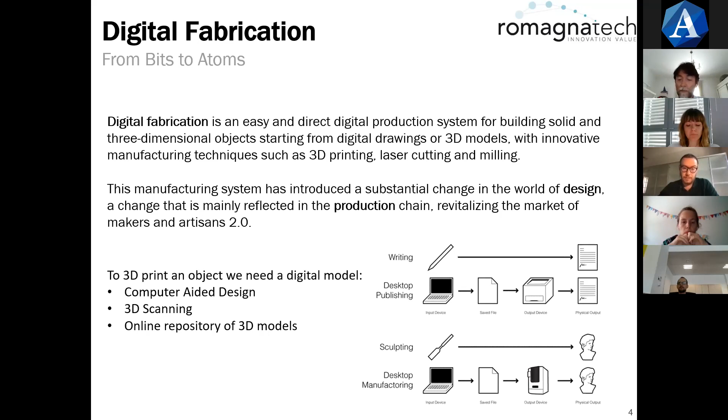To 3D print an object, we need, as I told, a digital model that is the starting point, and we can obtain it by means of a computer-aided design approach, by means of 3D scanning, or by browsing online repositories of 3D models. But digital fabrication inverts the economics of traditional manufacturing. I will come back also later to this theme because it's very important for our workshop.

In mass production, most of the costs are up front in tooling. So there are a lot of costs to set up the production, the manufacturing lines to produce goods and products. And the more complicated the product is, the more changes you need to make, the more it costs.

So in this picture, we can say that digital fabrication has a very different, reverse approach. What is expensive in traditional manufacturing processes is not expensive, is free for digital fabrication. For digital fabrication, variety is free, it is not a cost, complexity is not a cost, flexibility is not a cost. While these aspects are very important for the cost of traditional processes.

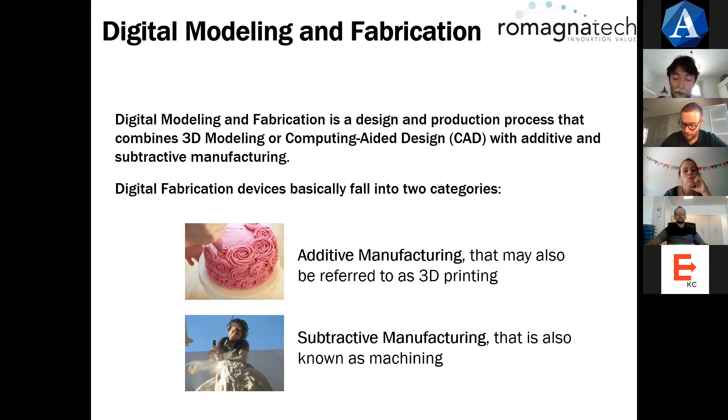We said that manufacturing and design, fabrication and modeling are strictly linked together, because in the digital modeling and fabrication approach, we combine 3D modeling and additive or subtractive manufacturing. Additive manufacturing can also be referred to as 3D printing, of course, and subtractive manufacturing is also known as machining or milling. These are just some pictures that show the different approach of these manufacturing technologies.

It is important to underline that additive manufacturing processes allow a reduction of waste material, so also an important attention to the sustainability of the production, instead of subtractive manufacturing that will produce more waste material.

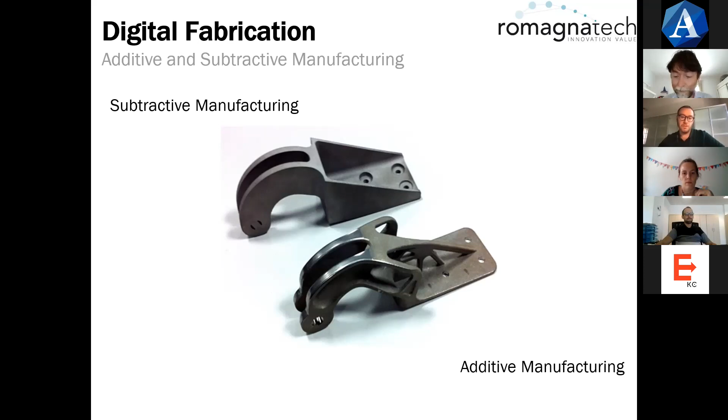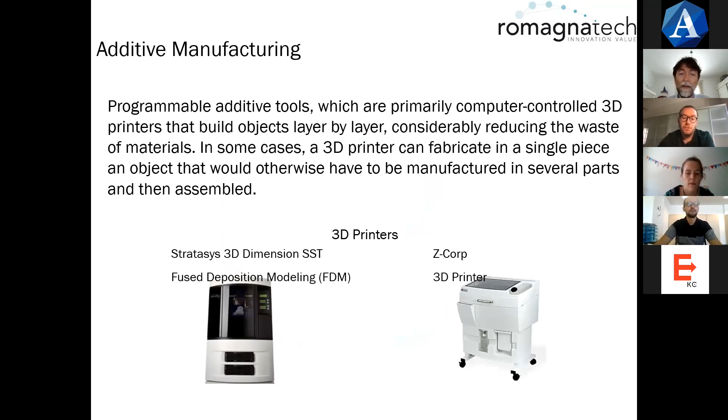We can clearly see that this kind of design, this kind of result, is not possible to obtain by means of traditional manufacturing processes. So we need a new design, and we need new technologies for manufacturing this kind of product. Well, we can quickly see additive manufacturing technologies, but we will have a better focus later, and also subtractive manufacturing, just to have a first comparison of these technologies.

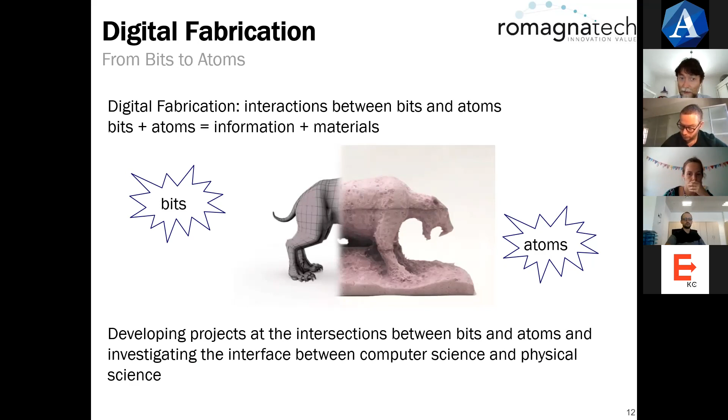So just to close this first introduction, we can say that digital fabrication is a way to move from bits to atoms, from information to materials, from data to materials. It is a way to move from digital to physical. This interaction between the digital world and the physical world is the basis of digital fabrication approaches. And a lot of projects are investigating ways to optimize the interaction between these two representations of the same object.

Well, talking about digital fabrication, we can jump back to 1998, to the Fab Lab concept. Fab Lab means fabrication laboratory, and Fab Labs represent a network of facilities for digital fabrication. The idea of the Fab Lab was conceived by Neil Gershenfeld, the director of the Center for Bits and Atoms of the Massachusetts Institute of Technology. So we find both aspects of the representation of an object, the data representation and the physical representation.

And the first Fab Lab started in 2002 at MIT, and in the following years, this model of digital fabrication really spread over the world, and this was possible by means of the standardization, the democratization of design tools, such as rapid prototyping, the digital networking between all the Fab Labs around the world, and also by means of the dissemination of good digital practices.

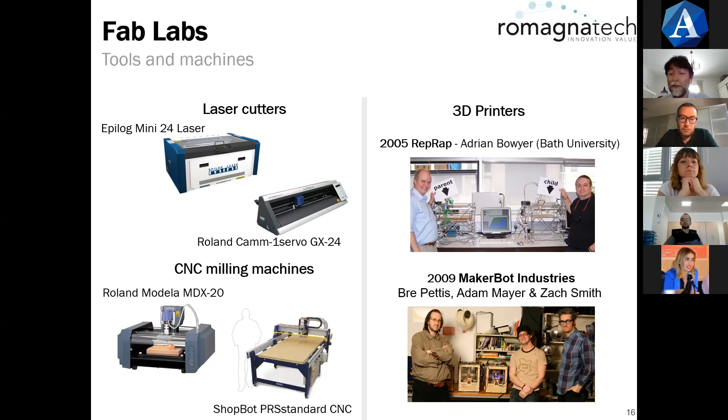So just an overview of the tools and machines of Fab Labs. We can see some laser cutters and CNC milling machines, and I have just posted some pictures of important steps in the 3D printing evolution. So the RepRap and the MakerBot machines that opened the way to the open access also to these kinds of technologies.

Well, now we can focus on different manufacturing technologies, just having an overview of what we can find in the world of additive manufacturing. It's quite recent, but fortunately we have some international standards that allow us to have definitions, to have a description of the general principles, to have some feedback on terminology and so on.

So the first thing that we can read is what is additive manufacturing, how additive manufacturing is defined. Well, there are a lot of definitions. We can see a lot of norms that we can use to refer to this kind of technology, but the international standard states that additive manufacturing is a process of joining materials to make parts from 3D model data, usually layer upon layer, and it is a process that is opposite to subtractive manufacturing and to formative manufacturing technologies. So a process of joining materials layer by layer. And this is the definition of this kind of manufacturing technology.

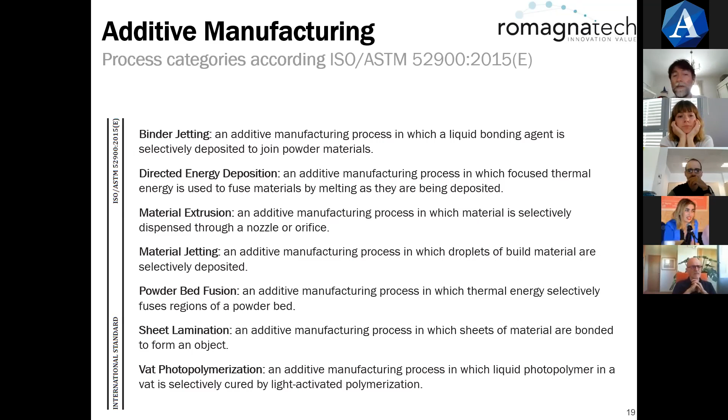Did we lose Massimiliano? ...show. Okay, you're back. Okay. Have you shared computer sound?

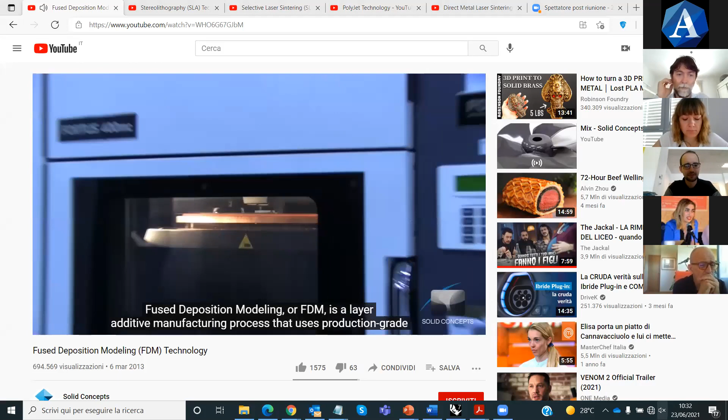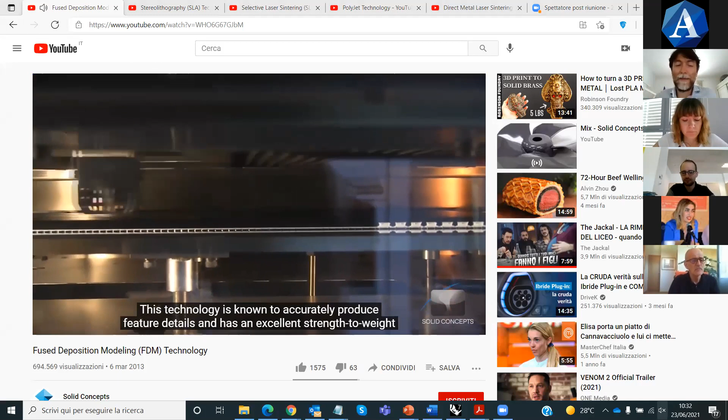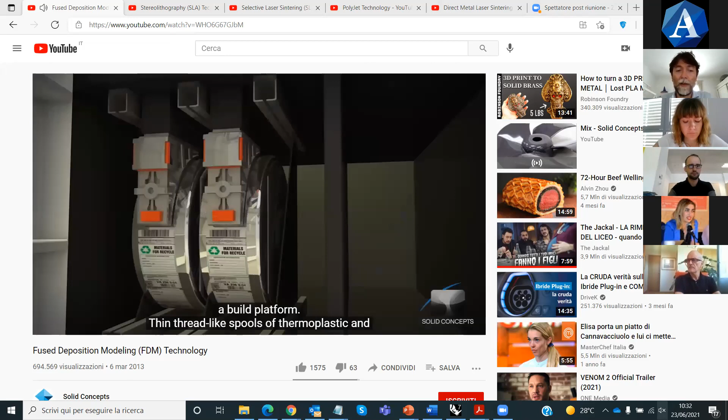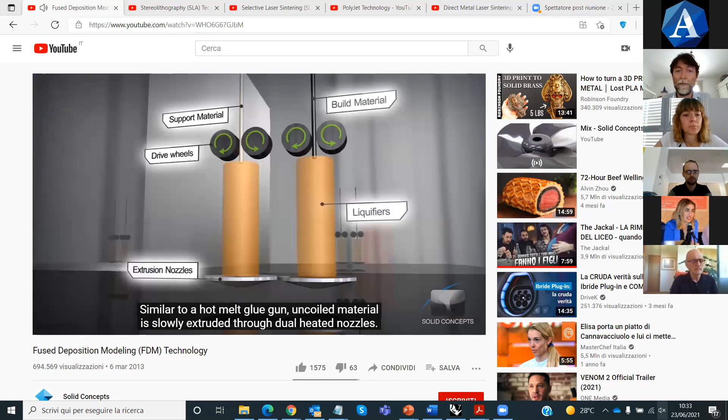Okay, this is the first family, fused deposition modeling. This is the most famous technology. It is very used by makers. It's very easy to find these technologies in Fab Labs and so on. These videos are showing the working principle. We have some thermoplastic filament that is extruded to build up the model layer by layer. Together with the build material, we can also have support material that is used to support the overhanging parts of the model, such as in this case.

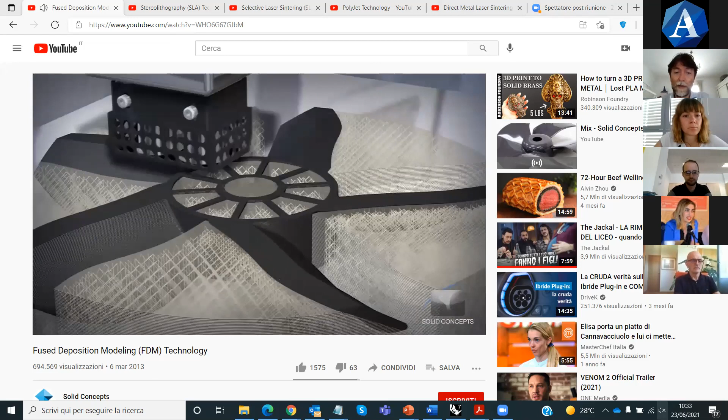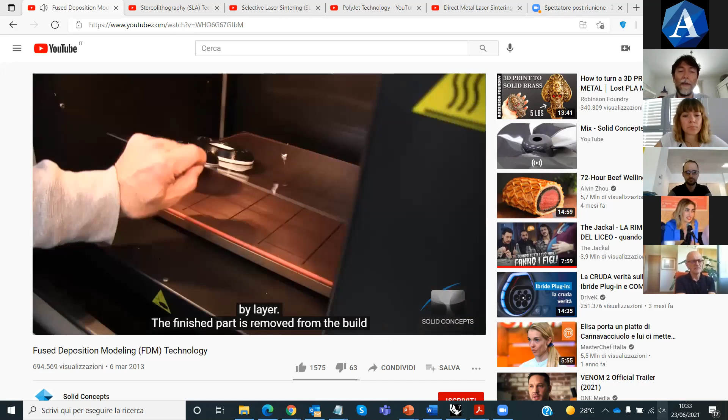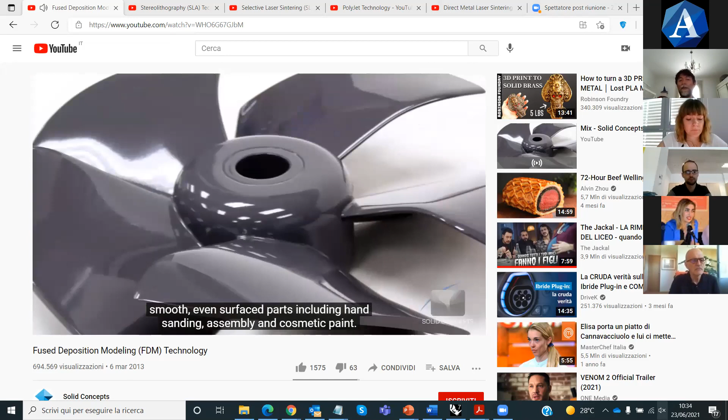Here we can see how this technology is working layer by layer. The different colors represent the different layers of the model. Now we can remove the support material, the white material, and clean the model. This is the final result, which also allows us to finish the surface of the model to give a better aesthetic aspect, following maybe requirements of the products.

And this technology is applied in a lot of applications because it's very functional.

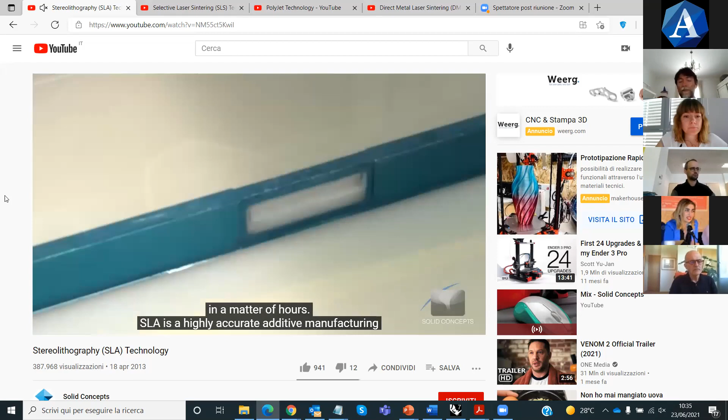We can close this and move to the second technology, called stereolithography. This is one of the most used for aesthetic prototypes, because this kind of technology gives us objects that are very nice from an aesthetic point of view, but the mechanical characteristics are not so good. So for functional prototypes it's not the recommended technology.

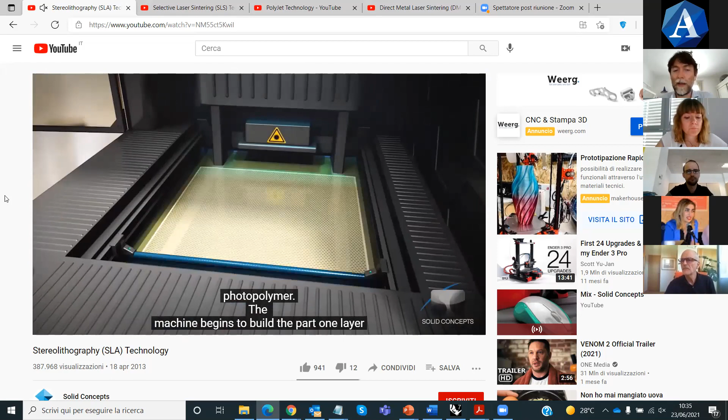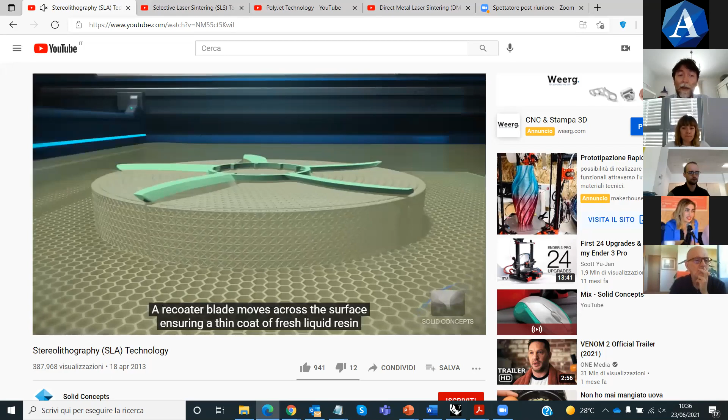But we know that we can face both functional or aesthetic prototypes, so we can choose the better support. In this case the working principle is based on UV resin that is hit by a UV laser, which allows the curing locally of the material. So we can also, layer by layer, complete the construction.

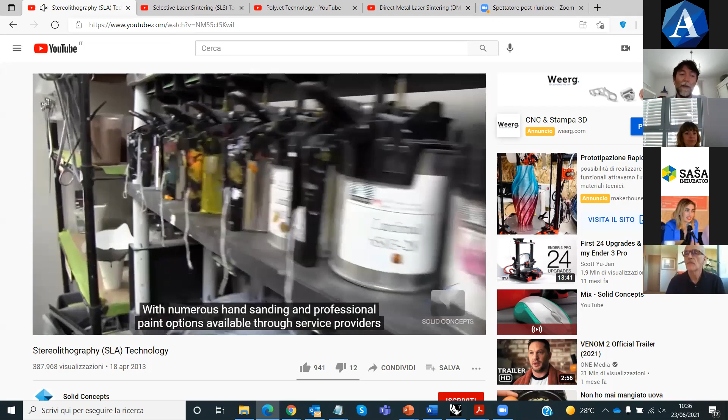We always need to clean the product. This is a post-processing step. We can see the superficial finish, the final coating, and this is the final result.

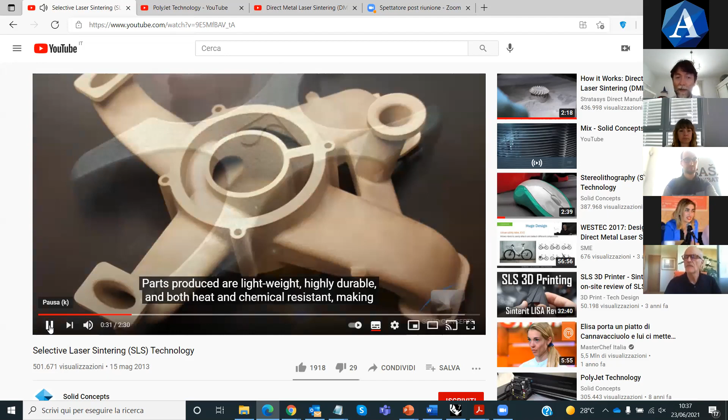We move to another technology that can also be used in a lot of fields of application, and this is called selective laser sintering. In this case, we have a powder that is sintered by means of a laser that hits locally the surface with the powder.

So the first layer is created, then we move to the second one, and so on.

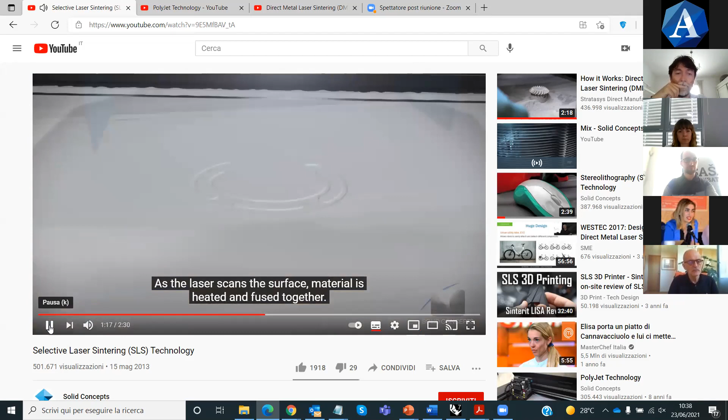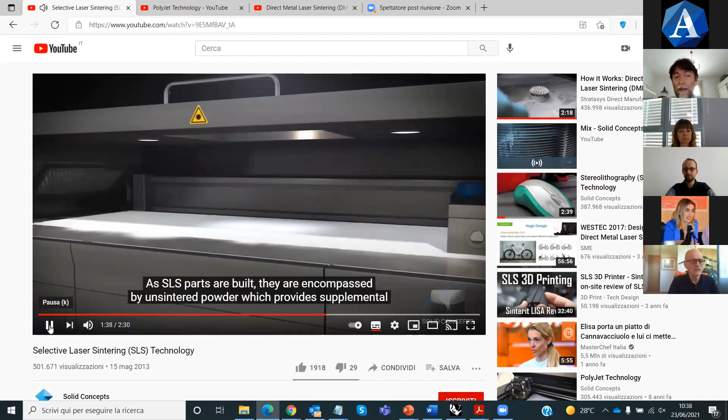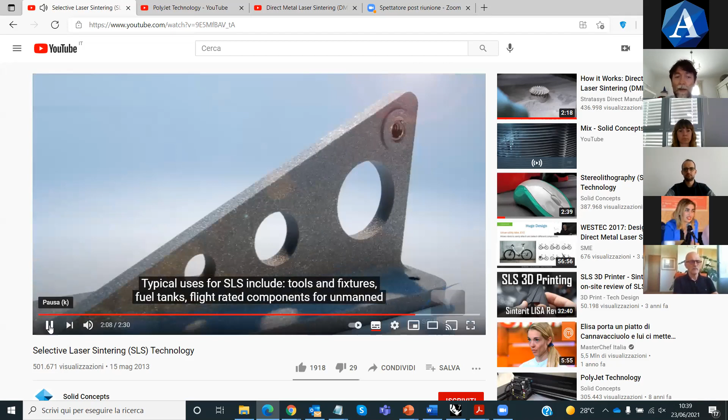All these technologies work by adding a layer of material on the previous layer, and it is important to manage the thickness of the layers to provide better results. So the basic principle is the same, that is the additive approach, but all these technologies are based on very different working principles.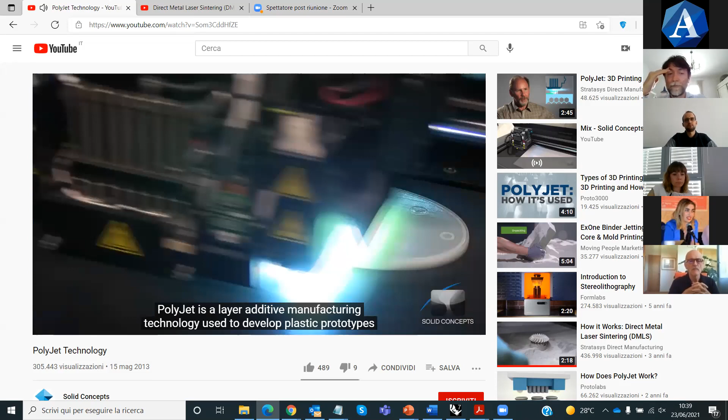Okay, we can see some examples of application. Now we have the last two technologies I'd like to show you. The market offers a lot more solutions, of course, but I think these technologies are the more suitable for this field of application, for what concerns manufacturing in craft activities. This is polyjet.

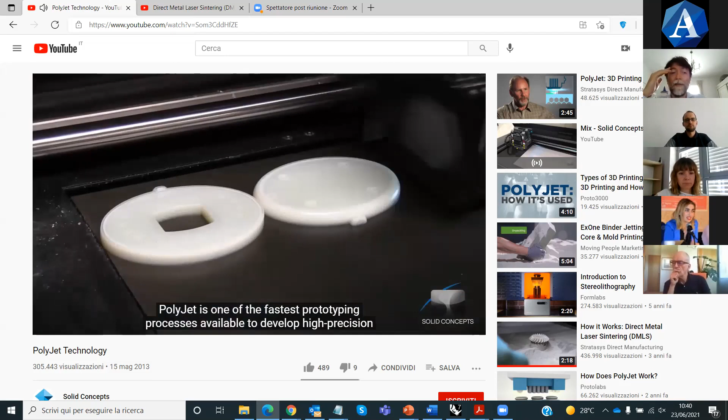You can see some toys, some products.

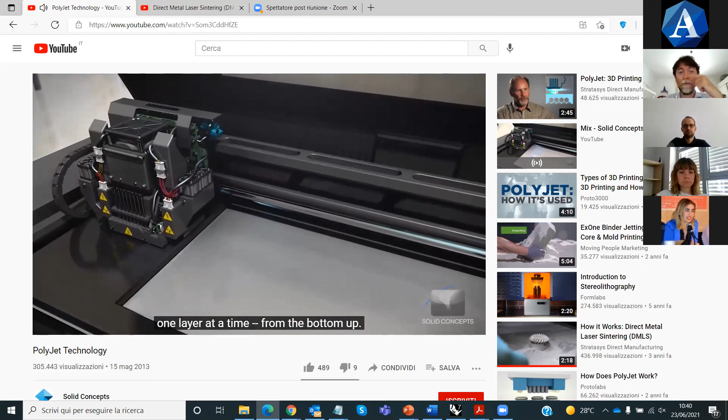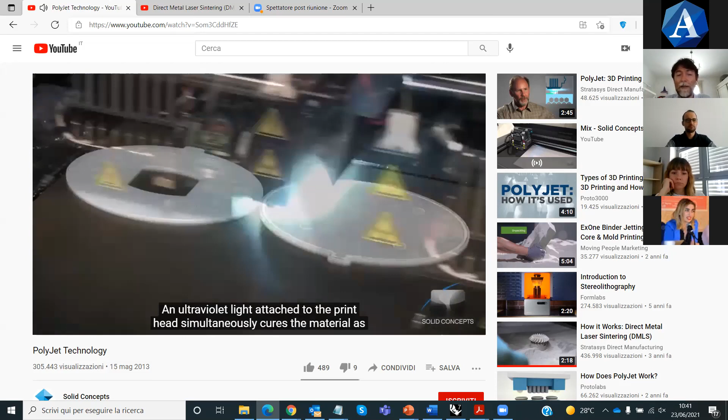We have some inkjet that is dropped down on the material, so that allows the selective creation of the layers.

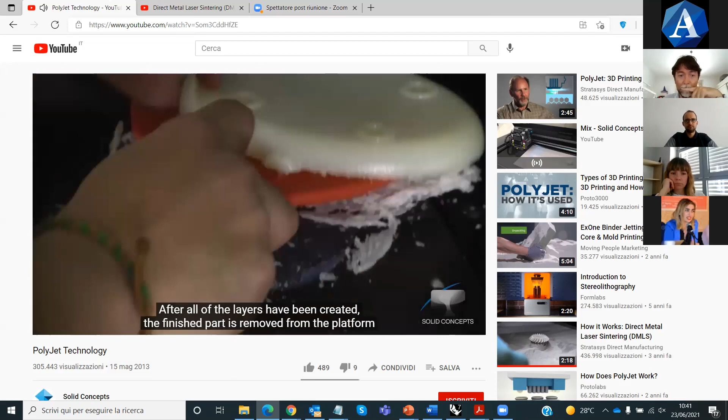Okay, yeah, the finish, the post-processing steps. Also in this case, we can have very nice prototypes, very nice objects, very nice products.

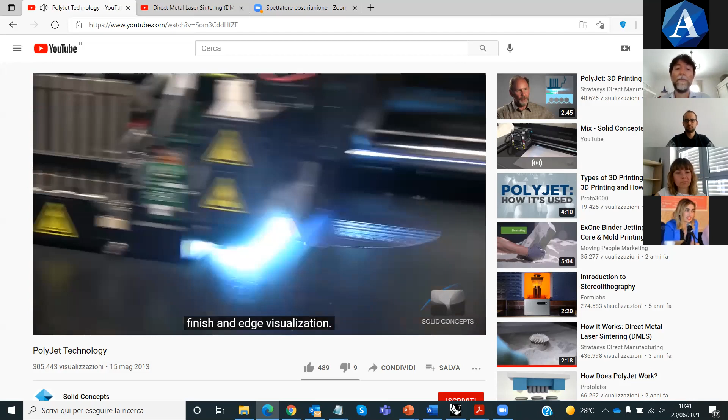Well, the last technology is quite different, particularly for what concerns the material that can be used. In this case, we are facing direct metal laser sintering. In the previous technologies, the basic materials were mainly polymers, different kinds of polymers, but

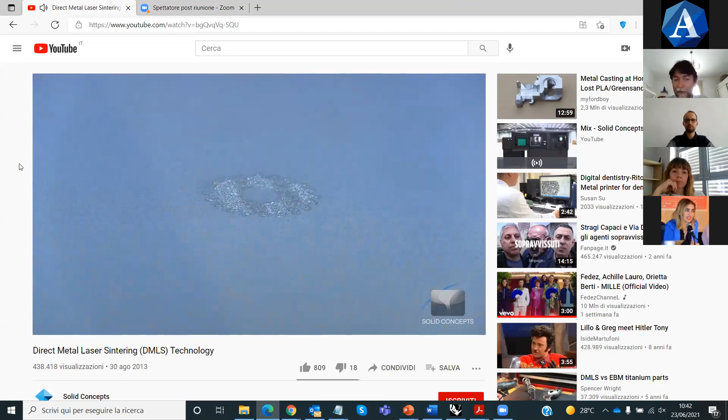with this technology we can also build objects with metals, different kinds of metals. So it is very useful for, for example, the manufacturing of spare parts, so that we don't need to have a lot of stock, and we can just produce on demand.

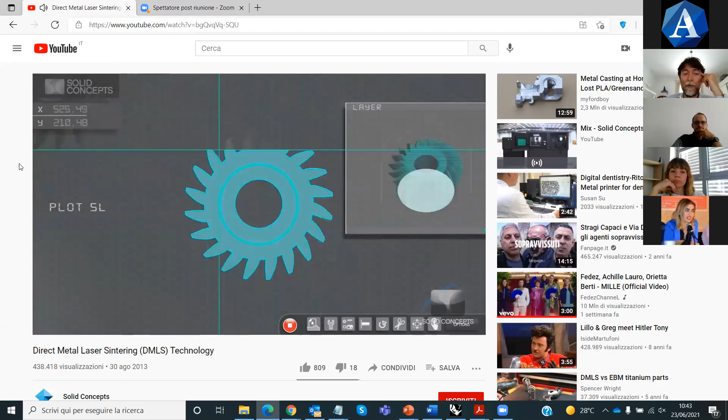Also, products that are not prototypes, but are products directly for the market.

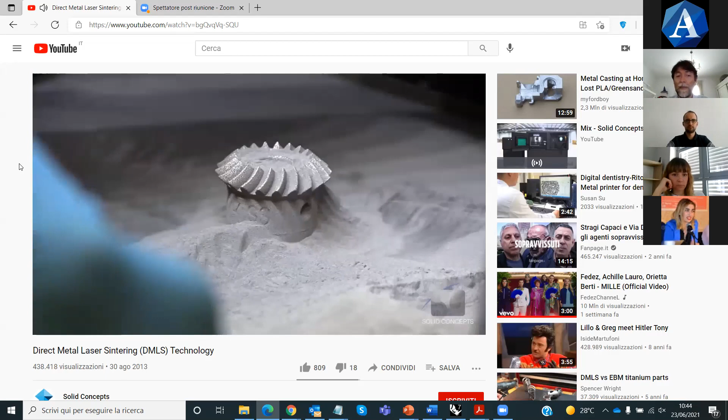The process is very similar to selective laser sintering. The main difference is the material, of course. In this case, we have metallic powders, and the source, a laser in this case, needs more energy since we need more energy to sinter the metallic powders.

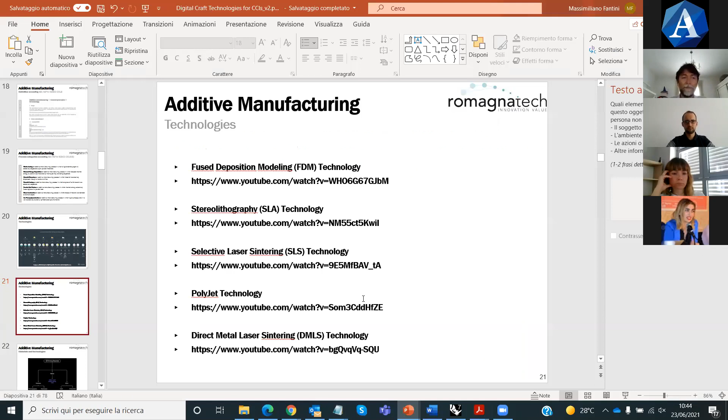So I think that's all for what concerns the video, just to have an overview of these technologies. And I'm going to close this first part of the presentation by focusing on the materials.

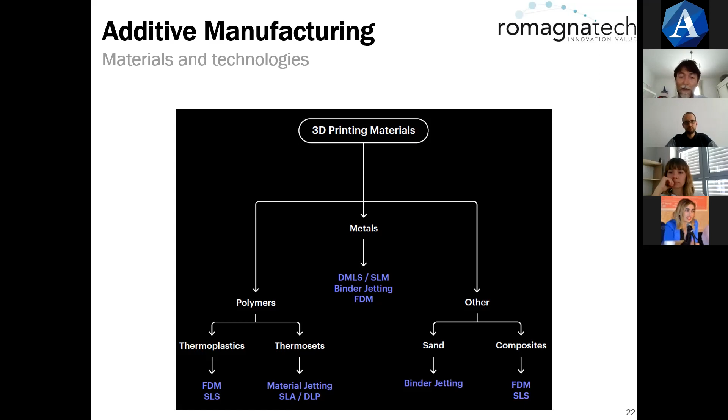We have seen different technologies, we have seen different families, and each technology faces specific materials. We can see that we have polymers, both thermoplastics or thermosets, depending on the additive manufacturing technology used. We can have metals, as we have just seen, but also other kinds of materials, such as sand, composites, and so on, but also fine materials such as chocolate for food manufacturing, also biomaterials for biomedical applications, and so on.

Of course, we can have different results according to the technology that we use, and we can select the technology according basically to the needs of the object that we need to prototype. So the first question is

why do I need this 3D printed object? Is it just for an aesthetic point of view, just to communicate a concept, or do I need to stress the object by means of some mechanical test to validate, for example, a design before going into the production steps. This kind of question allows us to understand and to try to choose the better technology to obtain the result.

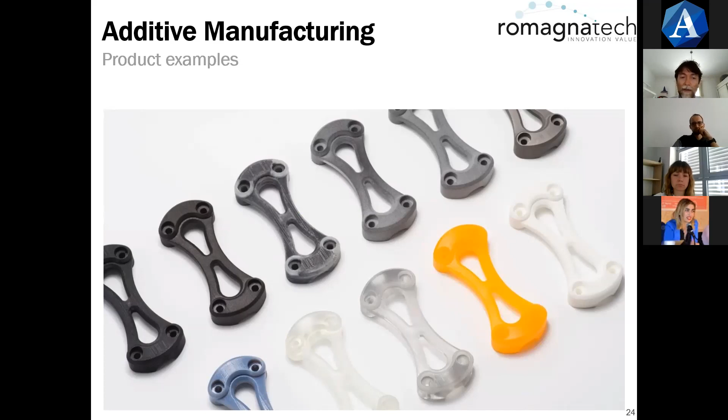And what can we do with this additive manufacturing technology? What can we do by means of digital fabrication? Here we can see just some examples that I've chosen for the field of creativity, the field of fashion, also interior design, and so on, also jewelry.

So there are a lot of possible applications that allow us to obtain results that we cannot obtain by means of a traditional manufacturing approach. So this technology allows us to change also the design processes.

We have seen that the design and the manufacturing are strictly connected, because they are different steps of the same process for developing new products. And of course, the capabilities of these manufacturing technologies are pulling new capabilities also in the design approach.

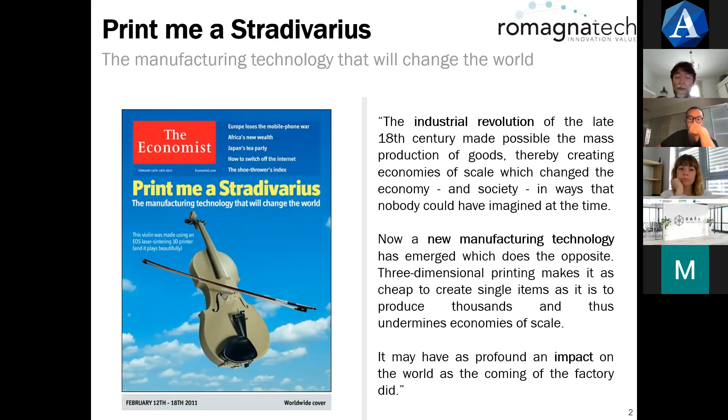Now, new manufacturing technologies such as additive manufacturing are doing the opposite. Three-dimensional printing makes it as cheap to create single items as it is to produce thousands of them. So it is not connected to economies of scale. If I need to create just a few products with this kind of technology, I can do it. So this approach to digital fabrication was seen as something that would change the manufacturing paradigms.

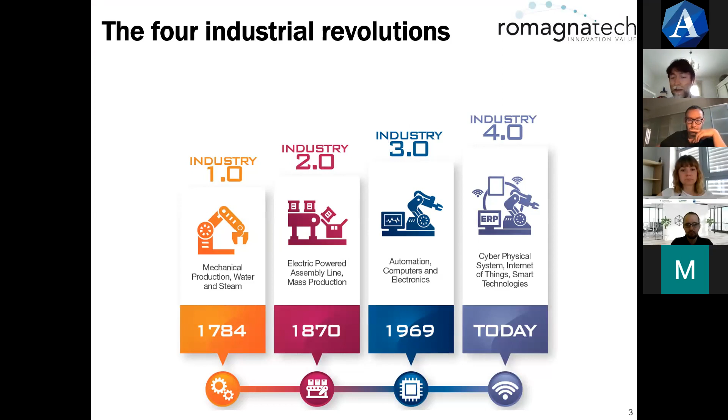So mechanical, electrical, informatica. So the fourth revolution is now facing new technologies, new approaches, new possibilities of managing both digital and physical things. Sorry. And this fourth industrial revolution, also known as Industry 4.0, is very important for what concerns innovation of products, open innovation, digital transformation, sustainability, and so on.

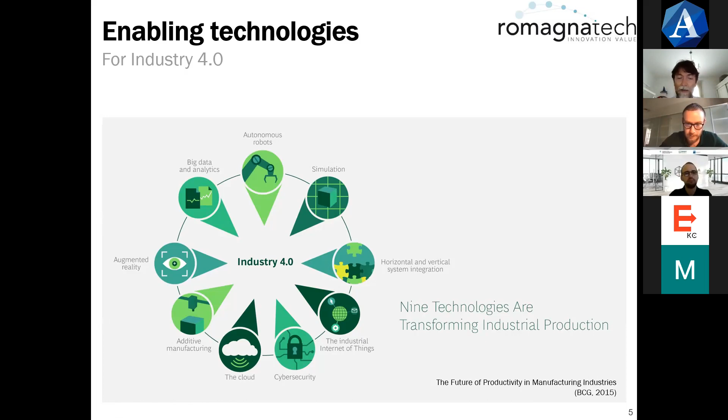We are back to 2015, so 5 years later, the title of The Economist, and this is a report of the Boston Consulting Group that, in this paper called Industry 4.0, the future of productivity in manufacturing industries, tries to identify the main technologies of the fourth industrial revolution. Within these 9 technologies, we can see also additive manufacturing. So this is just another point in favor of the application of additive manufacturing in industry.

Well, additive manufacturing is important because companies, we are in 2015, have just begun to adopt additive manufacturing, such as 3D printing, not just to prototype something, but also to produce individual components. So the most important step is moving from the prototyping application to the production application. This is a very important step in this kind of processes.

These additive manufacturing methods, Boston Consulting Group states, are widely used to produce small batches of customized products that offer construction advantages such as complex, lightweight design. We have seen also before how the design is a key factor to obtain good results.

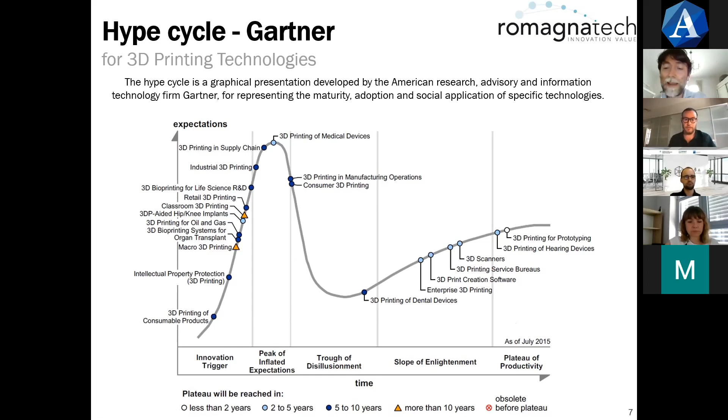So we can see anyway that in 2015 different technologies were already on the final part of the graph. That means that we are facing completely mature technologies. And of course, the first is 3D printing for prototyping, because as I told you, it was the first application and the most studied market segment.

By analyzing this 3D printing revolution, this is an analysis of Christopher Barnatt, 2016, 3D Printing. He tried to analyze markets and applications of the 3D printing revolution. He identified 4 distinct market segments: rapid prototyping, molds and tooling, digital manufacture, and personal fabrication. In the top line, which represents today in 2021, we have a completely mature market segment, rapid prototyping, as we have seen also in the previous graph by Gartner.

Also molds and tooling, and later we'll see in detail what kind of application it refers to, is in a good position. Digital manufacture is the third market, and finally we have personal fabrication, which is the last market in terms of starting point, but of course is the most promising, because it has the possibility to increase a lot in 3D printing adoption. The rapid prototyping market is quite full in adoption of this technology, but we have a long way to run for personal fabrication.

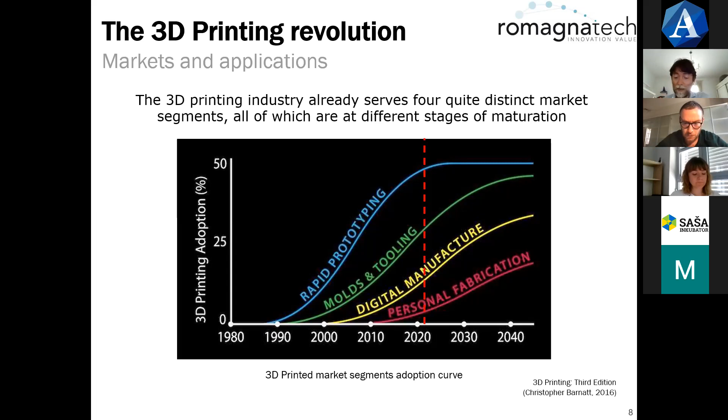Well, rapid prototyping, as is well known, means using technologies such as 3D printing to create prototypes or concept models, and mainly this application is used during the process of developing new products to reduce the time to market, the time from the idea of the new product to the release on the market. This is also known as a time compression technology. So with the aim to reduce the time to market, we can provide both aesthetic or functional prototypes.

Aesthetic prototypes are also called looks-like prototypes, while functional prototypes are also called works-like prototypes, because they have different aims. The goal of an aesthetic prototype is to provide a physical sample of what the product will look and feel like. In this case, this is the prototype of, for example, a ring, but the final product will be in different materials. This allows us to communicate the shape, to have a vision of the shape of the object.

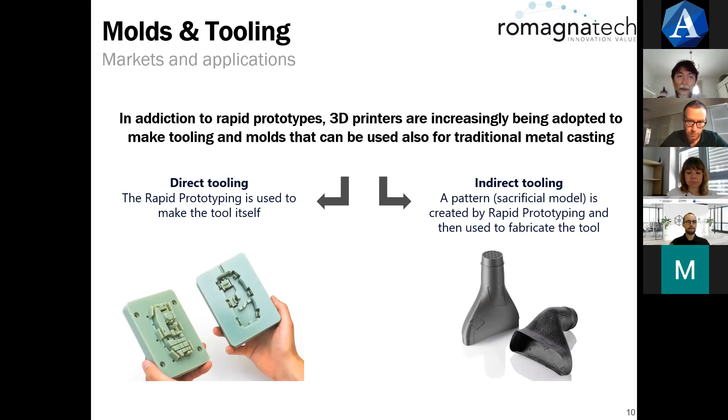So we have one more step in indirect tooling, and we can see here this item is the sacrificial model that will be used to create the mold on this shape, and then the mold will be used to obtain this, that is a final product made by, I think, composite materials.

Then we move to the third market segment that is called digital manufacturing, also called direct digital manufacturing. And what does it mean? Well, according to the American Society of Manufacturing Engineering, direct digital manufacturing refers to the process of going directly from an electronic digital representation of a part, so going from a 3D model directly to the final product by means of additive manufacturing. So the result of the process in this case is not a prototype, is not a tool or molds to obtain a product, but is the product itself.

So what drivers for direct digital manufacturing can we underline? There are four main aspects. The first is the ability to use 3D printing to optimize the geometry of final parts, often saving raw materials in the process. Second, make parts with geometries that could not be created by means of traditional approaches. Third, make low runs that would not be cost effective to manufacture without 3D printing. So if I have a small batch production, a small number of items to be done.

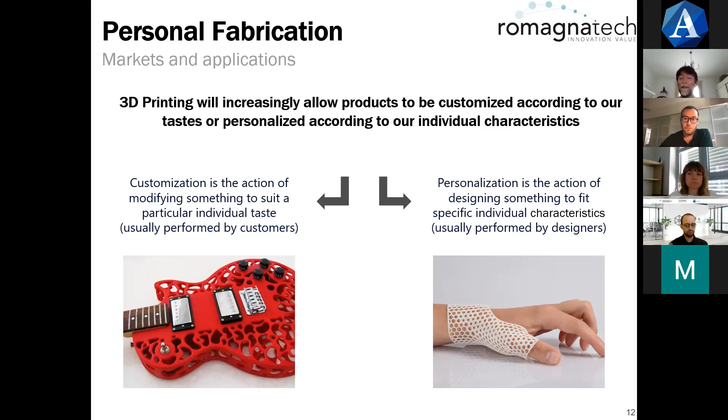Okay, so this aspect is usually performed by designers and is mainly used in the biomedical fields, and also fashion, also jewelry, if you want to provide some technology, some results, some products that completely fit the shape of the customer.

So we can also talk about this kind of revolution from the point of view of the manufacturing paradigms. We have seen the 3D printing revolution stepping through different market segments. Now we'll have a look at the revolution of the manufacturing paradigms. Manufacturing enterprises are involved in three main activities: design, make, and sell. This is as reported in the paper of Yoram Koren in 2010, the global manufacturing revolution.

These are the main activities: design, make. We have always talked about that, the design and manufacturing processes. Also, sell, of course, is an important activity that manufacturing enterprises have to face.

And the relationship between these three activities is able to identify specific manufacturing paradigms. So, different order of these activities changes the model of manufacturing. In craft production, we have sell, design, and make. The artisan, as the first step, sells the product to the customer, then moves to design it, and finally is able to make it.

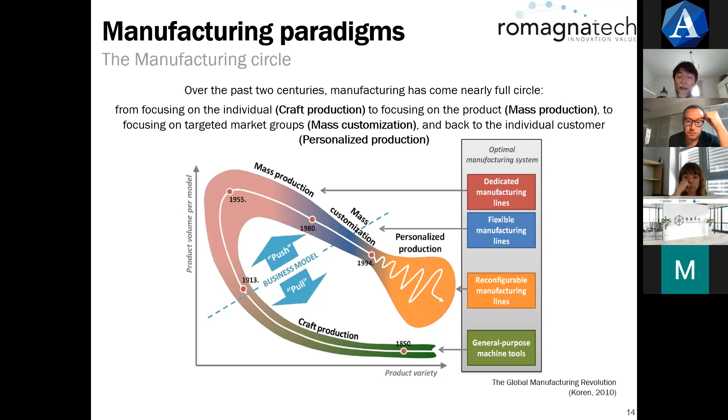So we can see craft production, mass customization, personalized production. And we can see that both from the point of view of the 3D printing revolution and from the point of view of the manufacturing revolution, the last step faced is personalized production.

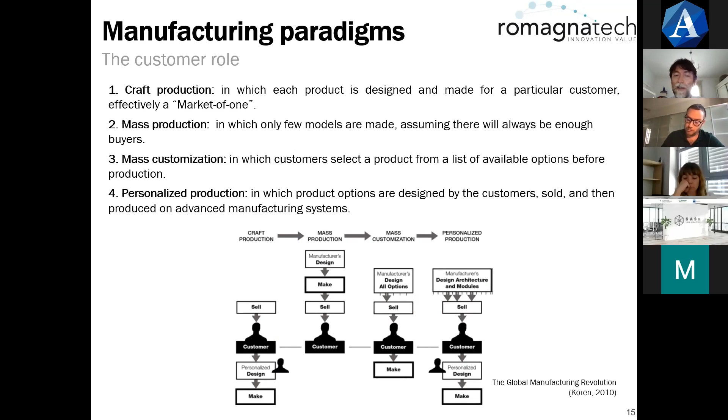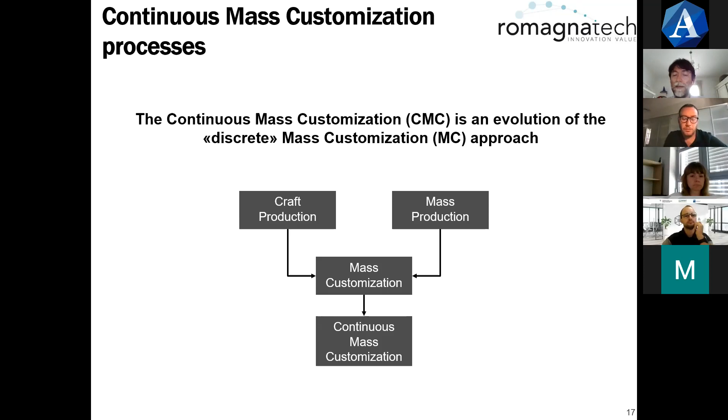So, coming back to the title of the presentation: continuous mass customization process. What does it mean? Continuous mass customization is an evolution of the discrete approach of mass customization. We can see mass customization as the possibility of developing a wide number of items, such as in the mass production approach, but with the possibility to customize these items, such as in the craft production capabilities. And the next step is to try to perform a continuous mass customization.

What does it mean? Now, in which context are we moving? Now there is an increasing number of consumers, of customers that are moving to the online market with new expectations, with new needs, and also with a new approach to the product. These customers are mainly informed about products and have an increasing awareness of these products. So product customization is a continuously growing trend. So customers always need something that is as much as possible tailored to their taste, their shapes, and so on. And how can this kind of process be supported?

The mass customization process is nowadays carried out through interaction of the consumer with a web interface that allows him to customize his product. So the user is directly involved in the design process, and that is why we have seen different schematic representations of the stakeholders in the different processes of manufacturing. In this case, the role of the customer is an active role that allows him to directly collaborate in the design steps.

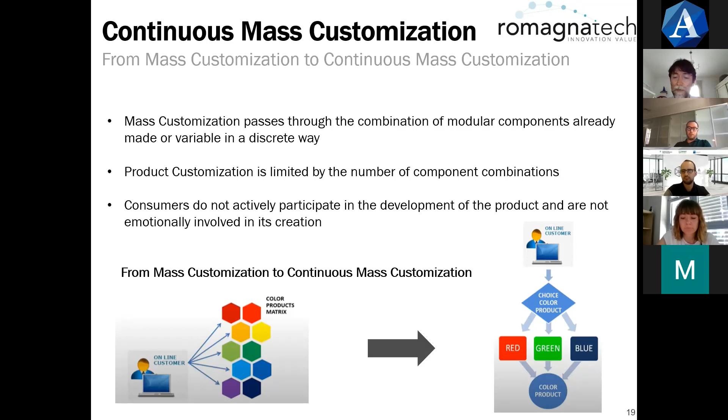So the idea is to move from mass customization to continuous mass customization. This is a clear example for what concerns a color product matrix, a palette of colors. In the first case, we can choose between a discrete number of colors. In the second case, we can decide the code, the RGB code of the color, so we don't have any limitation in the choice of these particular features.

Which tools do we need for continuous mass customization? Well, for concept design, we need generative interactive modeling tools that allow the consumer to collaborate, to participate in the design process without, of course, any specific 3D modeling skills. We cannot expect that consumers are particularly skilled in 3D design. So we need to provide tools that allow the interaction, but without the need of particular skills in doing that.

For what concerns manufacturing, of course, we come back to the things that we have talked about in this session. The first aspect is the flexibility of the production that can be obtained by means of 3D printing technologies, for example. It is important to access a wide variety of materials, but we know that also for 3D printing technologies there is very rapid growth in the number of available materials that we can use for this kind of technology.

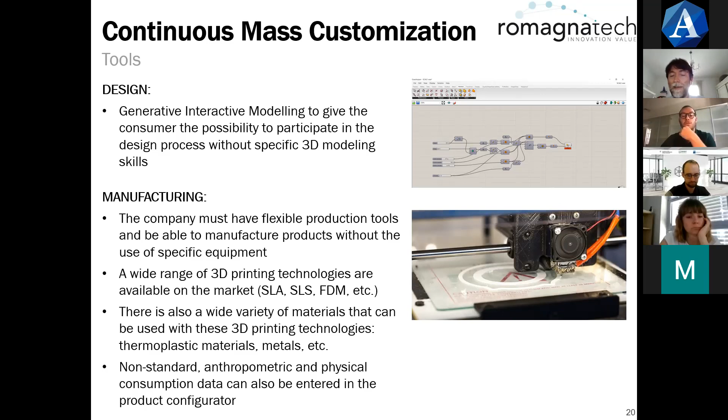And also in this process we can input non-standard data such as anthropometric measurements, physical data and so on. This is to answer the request for personalization. So the customer can interact for what concerns the customization aspect, and the designer can input some anthropometric data, for example, for the personalization aspect of the product.

So, benefits: the customer is actively and emotionally involved in the process. Greater is the commitment of the prosumer. It's no longer just a consumer, it is also a producer, so a consumer that has an active role in the choice of design, and so can have great satisfaction. It can feel identity with the product and so on. We can create links and connections between the consumers and the products, the consumers and the companies.

We can reduce the cost in market research, because I don't need market research, because it's the customer itself that is involved in the process of the design. Of course, I can also have a verification of what the market needs are, because I have continuous feedback from customers, and I don't need product stocks. The idea is a make-to-order approach instead of make-to-stock. So it completely changes the paradigm.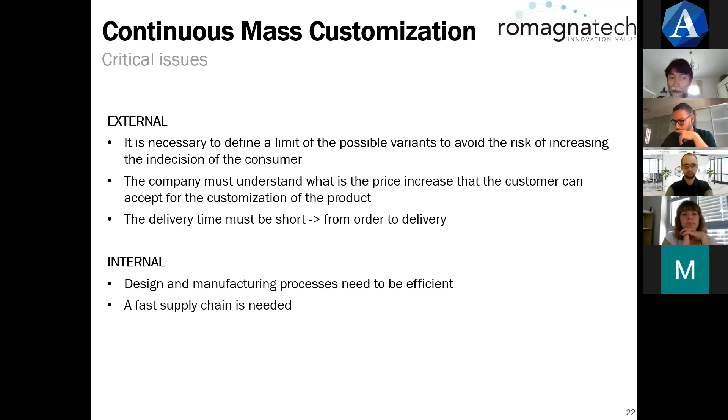There are also some internal critical issues. That means I need design and manufacturing processes that are more efficient with respect to the traditional ones. And also I need to set up a fast supply chain to quickly deliver the product once the customer has finished the design step.

So I just want to give you some examples that are specifically targeted on creative and cultural industries. This project is called Shape It, Forge Your Music, and this project was developed in a generative art hackathon. The idea is to move from music to shape. So what is the main process?

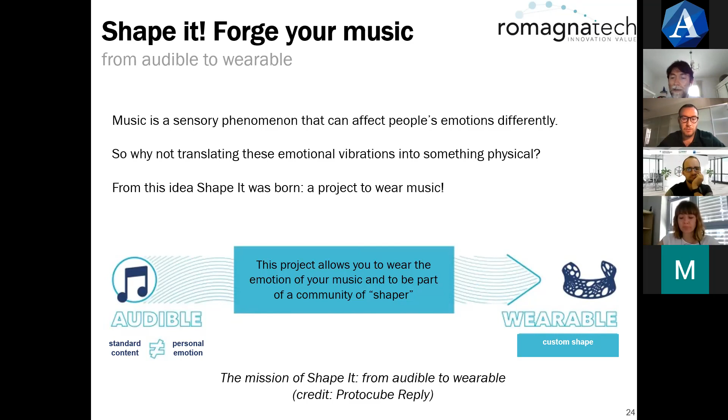Well, the idea is that music is a sensory phenomenon that can affect people's emotions. So why don't we translate this emotional vibration into something physical? So the idea is to pass from the music that I like to an object that represents that music. So the project was based on this mission, moving from audible to wearable. Audible means we don't have a standard content because each consumer can choose his favorite song. This song's audio is elaborated and some design rules are extracted. These design rules are used to design a wearable bracelet that is custom shaped based on the input of the soundtrack.

This is just a schematic picture of how this project was developed. We start with a soundtrack that is chosen by the customer. These data are extracted by means of sound pattern tools for analysis of the sound, and by means of a neural network that is able to identify the kind of musical song.

So we can extract both generic information, such as the genre of music, but also univocal information extracted directly from the soundtrack. These data are passed to Grasshopper and Rhino, which are software for computer-aided design that use VPL, visual programming language, to design the shapes. So in this case, we do not directly design in a traditional way, but we design the process that will allow us to build the final shape.

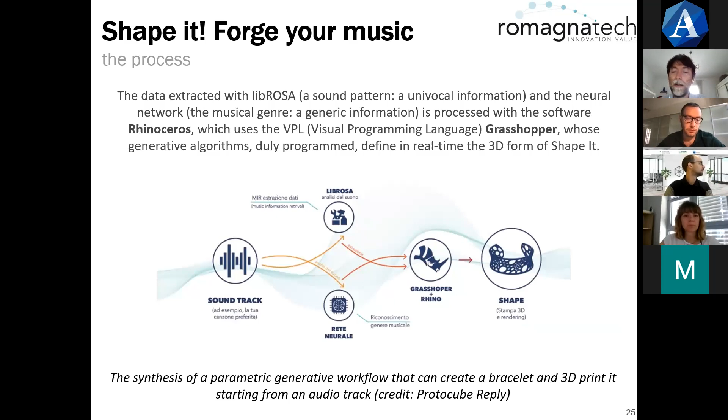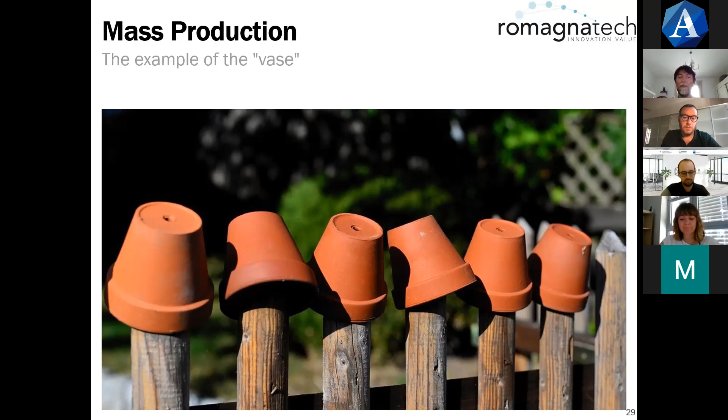We can move from this kind of approach to the mass production approach. In this picture, we have examples of the same vase in a huge number of items. All these objects are the same, so the same manufacturing process, the same shape, the same material, the same color, the same dimension, the same size, and so on. So this is a classical mass production approach.

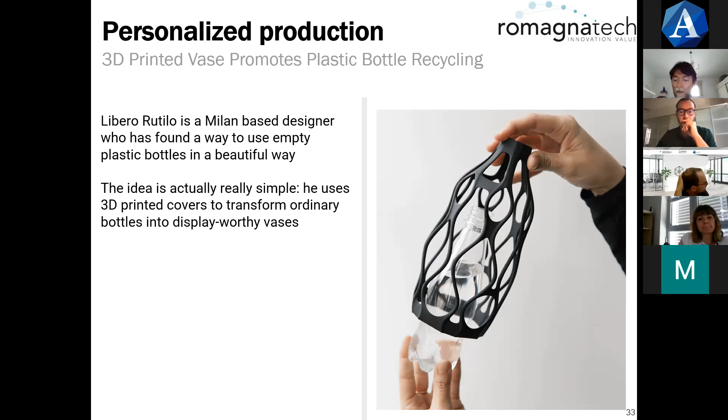This picture, I think, can really represent this approach of personalized production. We are always dealing with vases. This is also an interesting project, because the idea is to use empty plastic bottles in a beautiful way. So with this customized cover, we can cover the plastic bottles and use them as a vase. So we have the same plastic bottles inside, but different cover shapes that can be customized.

So I tried to show how this kind of technology can be interactive between the designer and the user, the design and the customers. Here you can find this link. If you go to that link, you will find this window with a simple vase with some parameters that you can find on the right. And by moving these parameters, you can modify the shape of the vase.

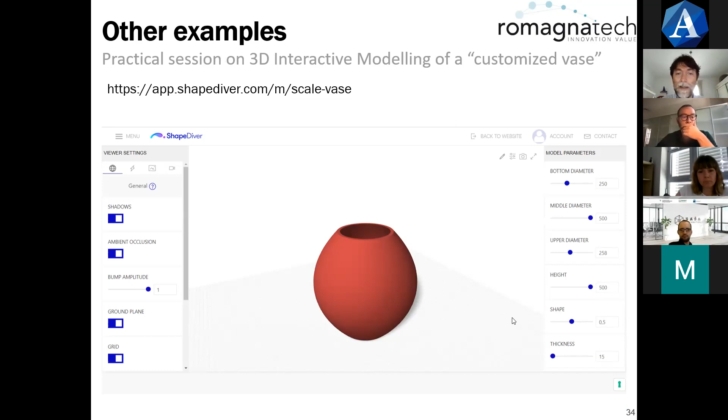The vase is very simple because, of course, if you move to complex geometries, we need a computational time that could need several seconds to redesign the shape. But this is just to have an idea of how this kind of technology will... No, I'll try to...

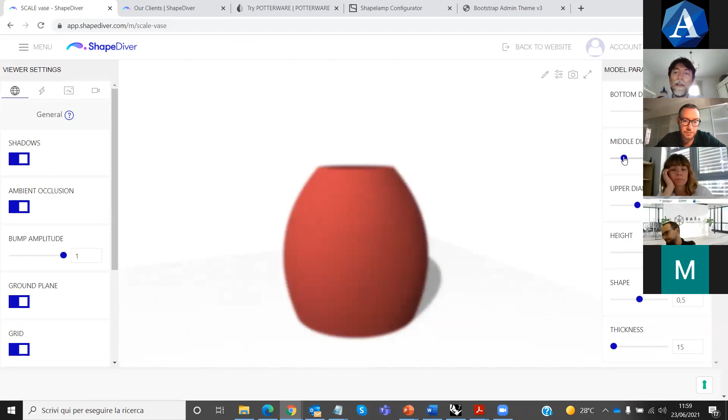Okay, here. This is the active window, so I need to move, and as you can see, you can move the object. It is very simple, but by moving this parameter, you can interactively change the design of the vase. So you can move.

And in this way, we can see that we don't have just one vase, we don't have a discrete number of shapes, but we have all the possibilities. So by means of this kind of technology, anyone is able to customize his product, to feel engagement, a strong commitment in the design step, and this can of course allow a complete customization process.

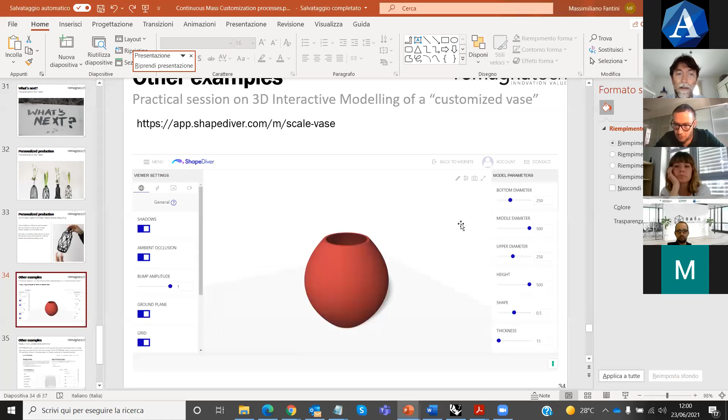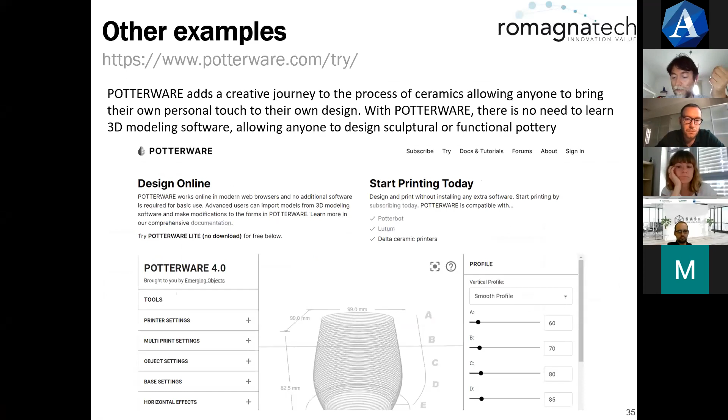So I come back to... it's not this one. Okay, I come back to the presentation, but just to close the second part, I also give you some other examples of products that can be customized. It's very simple. So you can try to design, customize, and modify the design of these simple objects, and this can be done without any specific skills in design.

Okay, also in this case I give you some references, and of course if you have more questions about this second part, you are welcome.

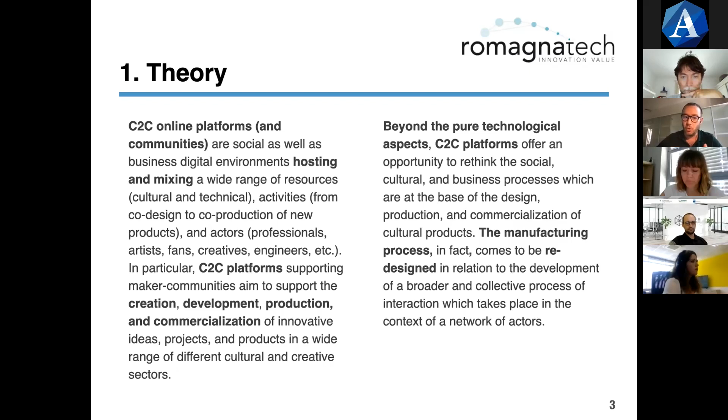So this is MyMiniFactory, a really interesting platform and community, because my argument is C2C online communities and platforms are for co-designing and co-production of new products, innovation and creative projects. I have called these platforms C2C because there is some theory behind it, but we can discuss this another time. It's interesting to understand that these are not professional networks or social networks, but hybrid networks that mix together social aspects like interaction and relationships, and business aspects of production. These communities are perfect for small producers, small artists, designers, and so on, and they are really open to different creative figures with different backgrounds - for example, makers, engineers, illustrators, creatives, and so on.

So, MyMiniFactory - this is the central page, the main page. You can see in the Explore window all the possible applications of 3D printing to cultural and creative industries. So we have fashion and accessories, jewelry, education, architecture, gadgets and electronics, toys and games, board games, fan art, home and garden - really interesting to see all these opportunities. For example, what is actually interesting is the opening of new markets, for example in the field of fans and passionate people, about films, comics, board games, online games, and so on.

This is interesting because this platform allows you to choose your own or choose a model, a 3D model, and print your 3D model at the nearest 3D printing fabric or Fab Lab, because this is a distributed ecosystem. So you can find what is the closest Fab Lab to your home.

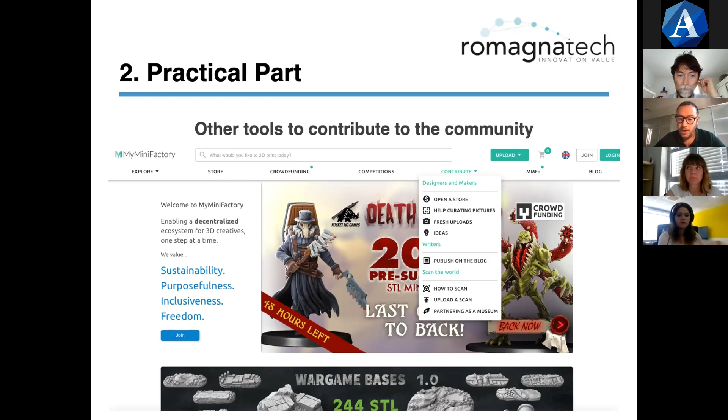Only this is interesting because it's a line for future development: education. For example, education is a really interesting future line, in my opinion.

So, that was my presentation. This is the closing.

This is a bit interesting because here I'll talk about competencies. What are the competencies that are actually needed, that we can put on the handbook and on the platform, that can be used and acquired by professional and cultural operators.

These competencies are relational, networking, and marketing competencies, because if you remember, Romagnatech is involved with process. We talk about manufacturing process that is actually changing, or there's an opportunity to change it with these technologies, and networking. So there's the social business part, the marketing part of the story.